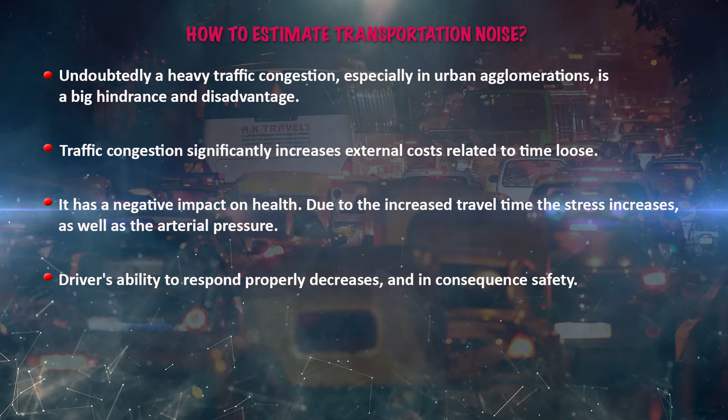Due to the increased travel time, the stress increases and also the arterial pressure increases. So the driver's ability to respond properly definitely decreases, and in consequence there is a safety issue. So these are the factors involved in the transportation sector. Although these effects of congestion resulting from excessive traffic, poor traffic management and sometimes drivers' errors are difficult to measure, many efforts are made to improve traffic flow, especially in urban areas.

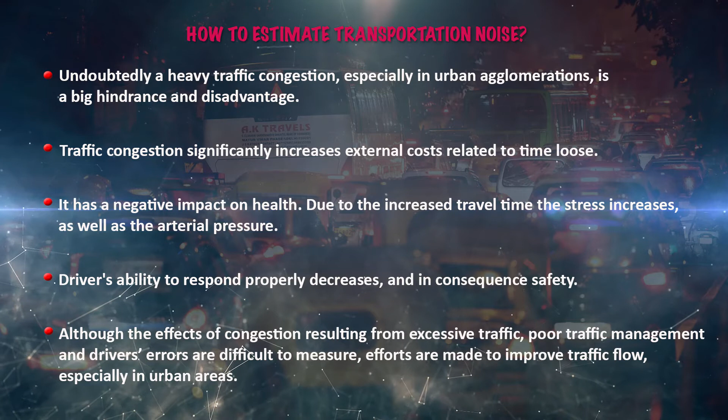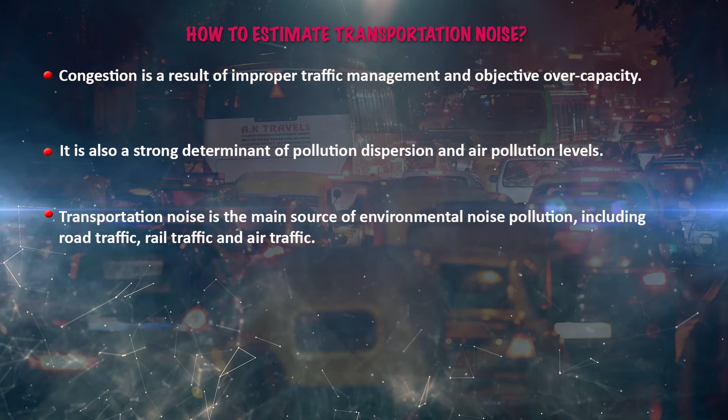Congestion is a result of improper traffic management and objective overcapacity. It is also a strong determinant of pollution dispersion and air pollution levels. So transportation noise is the main source of environmental noise pollution, like road traffic, railway traffic and also air traffic. There is a general rule: larger and heavier vehicles emit more noise than smaller and lighter vehicles.

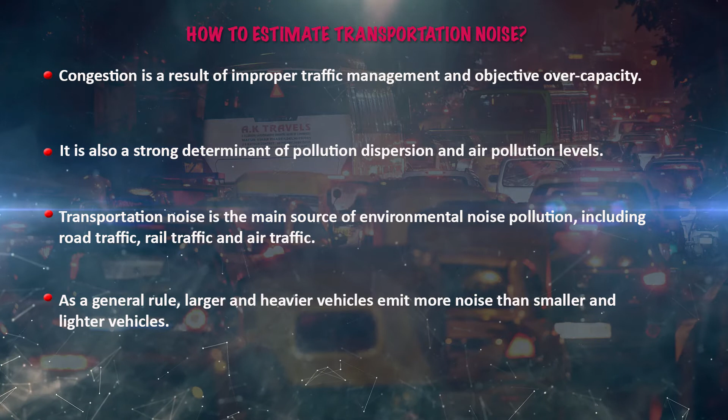Some exceptions are there, that means helicopters and 2 and 3 wheelers. The noise of road vehicles is mainly generated from the engine and also from frictional contact between the vehicle and the ground and air. In general, road contact noise exceeds engine noise at speeds higher than 60 km/h. The physical principle responsible for generating noise from the tire road contact is less well understood. That means it is not properly studied.

So the sound pressure level from traffic can be predicted from the traffic flow rate, the speed of the vehicles, the proportion of heavy vehicles and the nature of the road surface. Special problems will arise in areas where the traffic movements involve a change in engine speed and power, like traffic lights, hills, and intersecting roads. Sometimes topography, meteorological conditions and low background levels are unfavorable, like mountain areas.

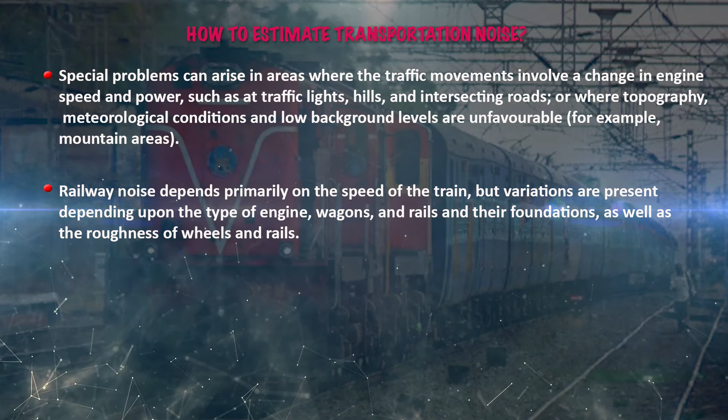Railway noise depends primarily on the speed of the train, but variations are present depending upon the type of engine, type of wagons, rails and their foundations, and the roughness of wheels and rails. It is very interesting to know that small radius curves in the track, as may occur for urban trains, can lead to very high levels of high frequency sound, known as wheel squeal. Noise can be generated in stations because of running engines, whistles and loudspeakers, and in marshalling yards because of shunting operations.

The introduction of high speed trains has created special noise problems with sudden but not impulsive rises in noise. At speeds greater than 250 kilometers per hour, the proportion of high frequency sound energy increases and the sound can be perceived as similar to that of overflying jet aircraft. Special problems can arise in areas close to tunnels, in valleys or in areas where the ground conditions help to generate vibrations. The long distance propagation of noise from high speed trains will constitute a problem in the future if environmentally friendly railway systems are expanded.

Aircraft operations generate substantial noise in the vicinity of both commercial and military airports. Aircraft takeoffs are known to produce intense noise, as well as vibration and sometimes rattle sound. The landing procedures also produce substantial noise in long, low altitude flight corridors.

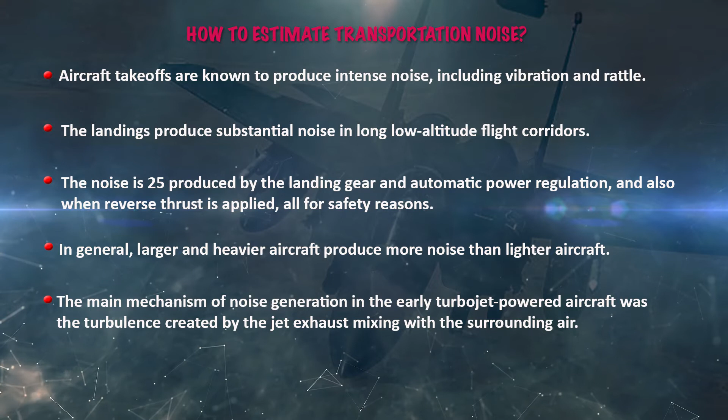So the main mechanism of noise generation in the early turbojet powered aircraft was the turbulence, which is created by the jet exhaust mixing with the surrounding air. This noise source has been significantly reduced in modern high bypass ratio turbofan engines that surround the high velocity jet exhaust with lower velocity airflow which is generated by the fan.

So the fan itself can be a significant noise source, particularly during landing and also taxiing operations. Multi-bladed turboprop engines can produce relatively high levels of tonal noise. The sound pressure level from aircraft is typically predicted from the number of aircraft, the type of airplanes, their flight paths, the proportions of takeoffs and landings, and the atmospheric conditions.

So severe noise problems may also arise at airports hosting many helicopters or smaller aircraft which are used for private business flying, training and sometimes leisure purposes. Special noise problems may also arise inside airplanes because of the vibration. The noise emission from future supersonic aircraft is of course unknown.

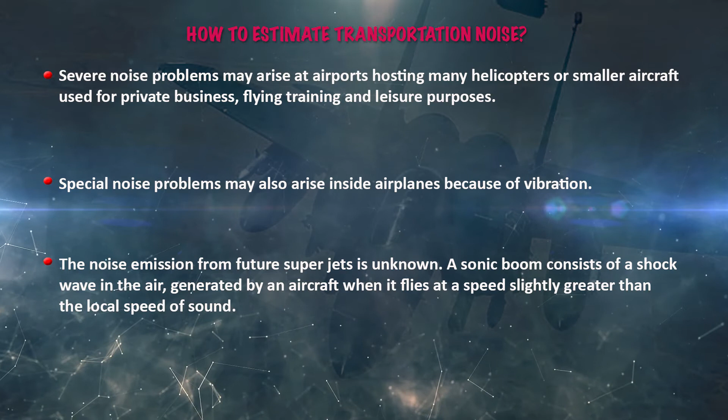So a sonic boom consists of a shock wave in the air which is generated by an aircraft when it flies at a speed slightly greater than the local speed of sound. An aircraft in supersonic flight trails a sonic boom that can be heard up to 50 kilometers on either side of the ground track, depending upon the flight altitude and the size of the aircraft. A sonic boom can be heard as a loud double boom sound. At high intensity it can damage property.

Noise from military airfields may present particular problems compared to civil airports, for example when used for nighttime flying, for training interrupted landings and takeoffs, that means touch and go, or for low altitude flying. In certain instances, like wars or specific military activities, there will be other intense noise pollution from heavy vehicles like tanks, helicopters, and small and large firearms.

So there are 5 types of transportation noise estimation. The first one is internal combustion engine noise prediction. When the internal combustion engine is working, it generates a lot of noise in the surrounding environment. Noise can disturb people's daily life and even endanger people's health. So noise has become a growing concern of society. When people are exposed to noise for a long time, it can cause insomnia, cardiovascular diseases, and sometimes death.

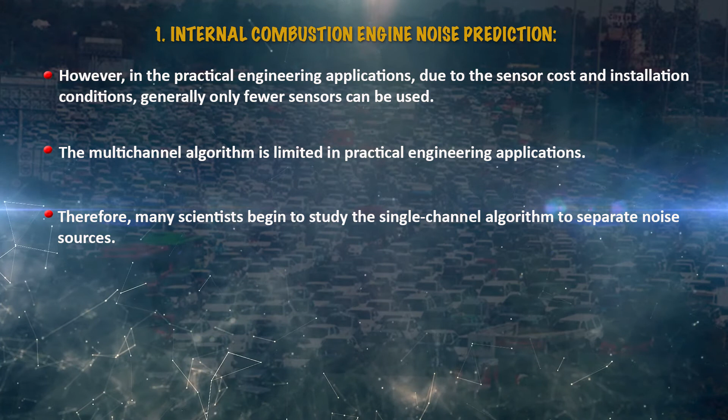The Global Legislative Committee is developing strict regulations to make ships, cars, and other transportation vehicles quieter. However, in practical engineering applications, due to sensor cost and installation conditions, generally only fewer sensors can be used. So the multi-channel algorithm is limited in practical engineering applications, and many scientists began to study single channel algorithms to separate noise sources.

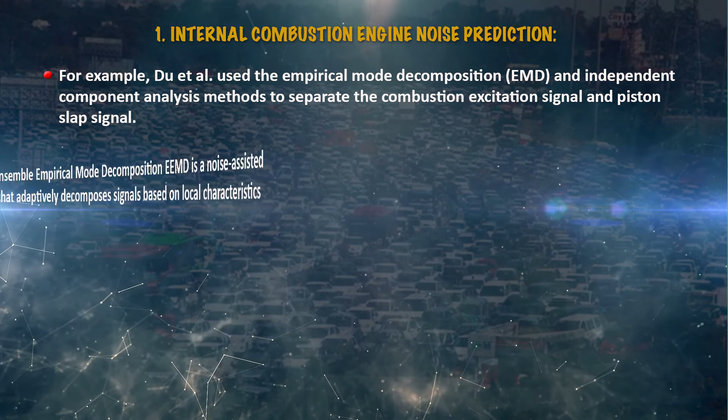For example, Du et al. used empirical mode decomposition, EMD, and independent component analysis methods to separate the combustion excitation signal and the piston slap signal. Another mode is the ensemble empirical mode decomposition, EEMD, which is a noise assisted data analysis method that adaptively decomposes signals based on the local characteristics of signals.

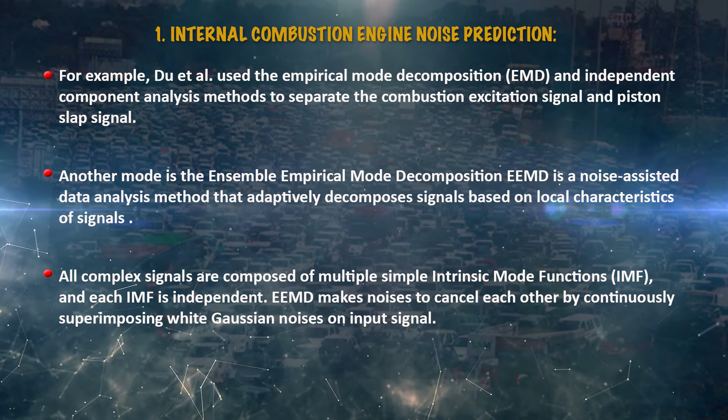So all complex signals are composed of multiple simple intrinsic mode functions, IMF, and each IMF is independent. EEMD makes noise cancel each other by continuously superimposing white Gaussian noise on the input signal. In this way, this method can decompose different scales or trend components that really exist in the data time series step by step and generate data sequences with the same characteristic scale size, and the additional noise is gradually eliminated one by one. The final result of denoising is the signal itself, because it is the only durable and stable part of the EEMD.

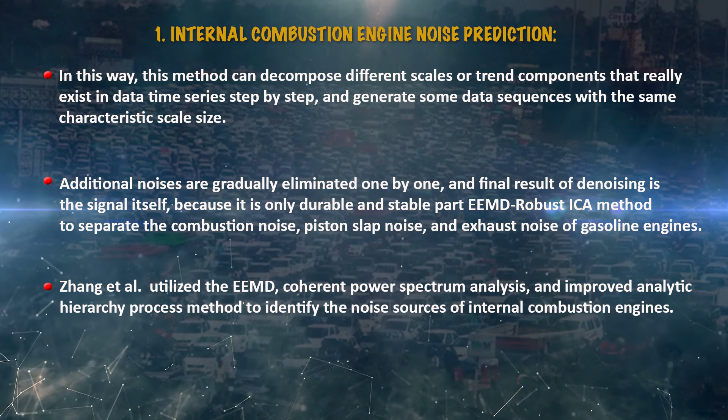The next one is the robust ICA method to separate the combustion noise, piston slap noise and exhaust noise of gasoline engines. They utilize EEMD coherent power spectrum analysis and an improved analytic hierarchy process method to identify the noise sources of internal combustion engines. In some cases, EEMD and generalized transform methods are employed to separate the combustion noise, piston slap noise as well as gear noise.

The second method we have to look into is exhaust and intake noise prediction. Intake and exhaust noises are the most significant sources of exterior vehicle noise. The intake and exhaust operating noise systems are divided as primary noise sources, and we can see pressure fluctuations in the manifolds and their propagation to the exhaust tailpipe or intake orifice, which is radiated as noise, caused by the primary noise source, being the unsteady mass flow through the valves.

So the system which is responsible for engine breathing or primary noise is similar, as it is suitably harnessed to improve the volumetric efficiency of the engine by wave action tuning.

And the secondary noise sources, that is the flow motion through the intake and exhaust systems, which are responsible for secondary noise sources. So this self-induced noise we can normally call flow noise. Then the structure radiated sound, that means shell noise from the intake or exhaust tailpipes, which are energized by either primary or secondary noise sources. And aerodynamic noise consists of both the classes, that is breathing and flow noise.

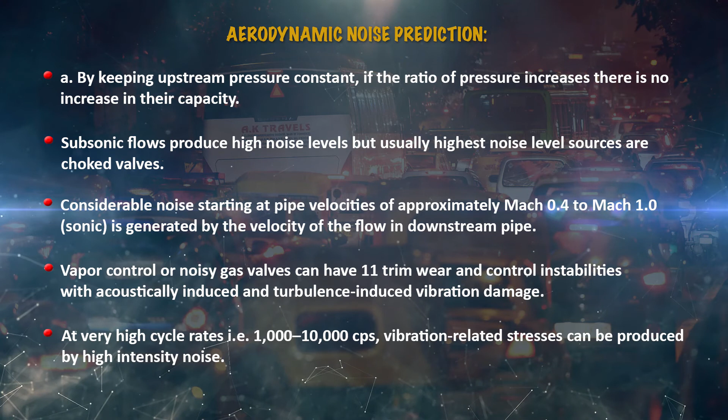So considerable noise, starting at pipe velocities of approximately 0.4 to 1.0 sonic, is generated by the velocity of the flow in downstream pipes. So here we have to consider vapor controls also. That means in vapor control, noisy gas valves can have trim wear and control instabilities, with acoustically induced and turbulence induced vibration damage. At very high cycle rates, that is 1000 to 10,000 CPS, vibration related stress can be produced by the high intensity noise. Valve service life can be drastically reduced by noise induced damage, and in some cases it may be responsible for valve or piping failures quickly, in minutes or hours.

And also we have to see brake noise prediction. Brake noise has been an issue of concern to vehicle manufacturers, because brake noise can be categorized into 4 basic categories. The first one is brake squeal, which has a tonal character, with components above 1000 Hertz. Then brake moan, which occurs at moderate speed and is characterized by 100 Hertz frequency components. The third one is brake creep groan, characterized by frequency components of approximately 100 Hertz, and it occurs at speeds less than walking pace. And the fourth one is brake judder, characterized by frequency components of about 10 Hertz, at speeds less than walking pace.

So all four categories of brake noise are because of the pairing of friction surfaces at the rotor disc and the pad. The disc, the pads and also the caliper, these three assembly components are the brake components that radiate brake squeal noise. In the case of brake judder, moan and creep groan, the resonant frequencies of the brake components are usually so low, that means less than 1000 to 2000 Hertz, so the vehicle suspension acts as a resonating system. With all these specifications, we have to understand that there are so many methods in practice for noise impact, noise as well as vibration.